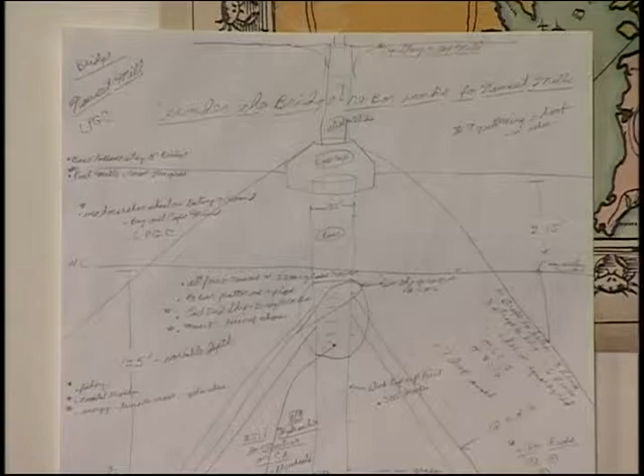Now, as I just explained, these 6 themes, as I call them, are the basis of all the bridge designing that I'm doing with the new middle bridge, or whatever we want to call it. And if these don't make sense, then the whole idea about the windmill bridge designs with the pavilions, etc., none of that makes sense either, because everything's built upon these foundational themes or theories.

And I've been working at this for a number of years, and I do believe I've solved the energy crisis. I think it was out there for anyone to solve, and I think I've solved it. But of course, this will take a lot of work and time and major effort from the world to do this whole project, which is probably the biggest infrastructure project the world has ever known, if it does happen, and I hope

it does. Now, I want to talk about what I call the Nauset mills. The Nauset mills are kind of a scaled down version of the Georges Bank mega mills. And if we would like, we can build them here, local industry.

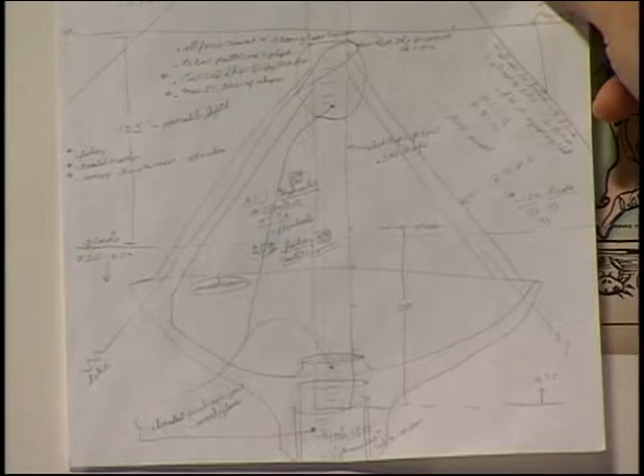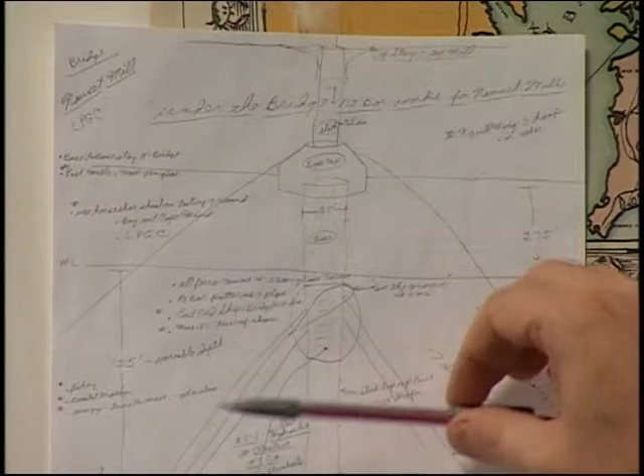So the mushroom anchor part is down here, and these pieces all fit together with threaded fittings. And then your grade or your bottom of the ocean would be about, whoops, bottom of the ocean be about right here. These are like a boat stand. These are 4 or 6 legs, and this is a fitting here that has threads, so this would thread into that and thread into that.

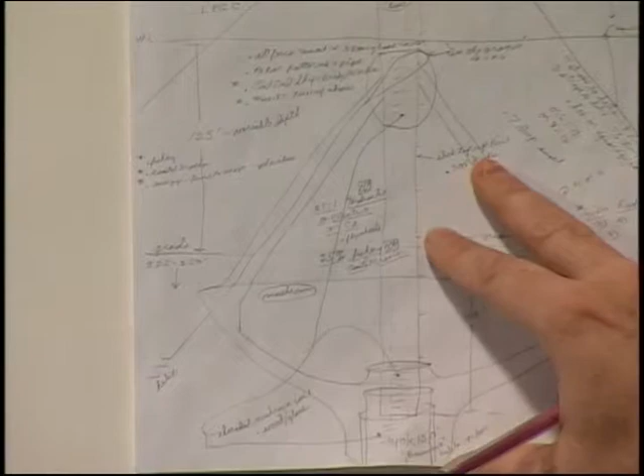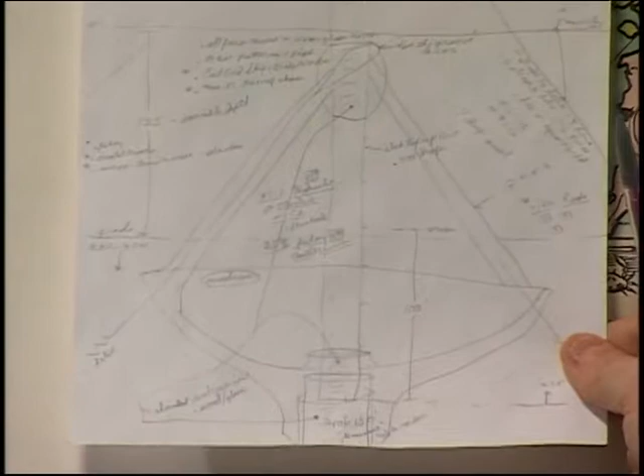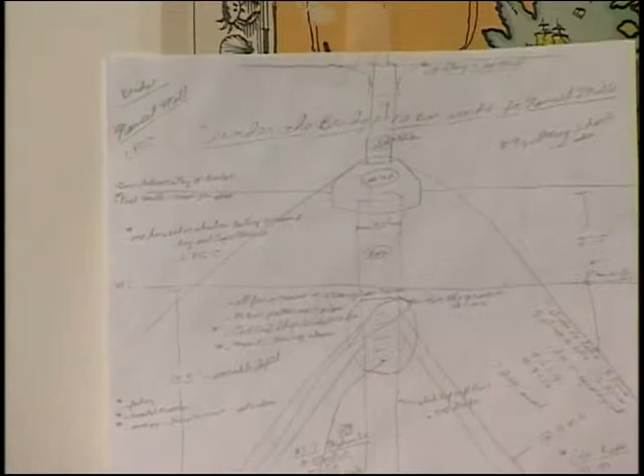And then what I didn't mention here was down below you have a big pipe going way down. As I have it drawn up, it's a 40-foot by 150-foot basement, I call it, because the stick, the whole theory is to go high you got to go low, and your stick wants to come way down into the sediments where we will hunker down from great winds. So that's that.

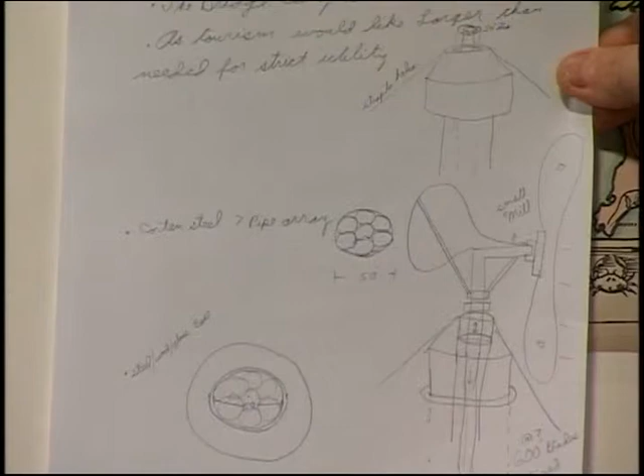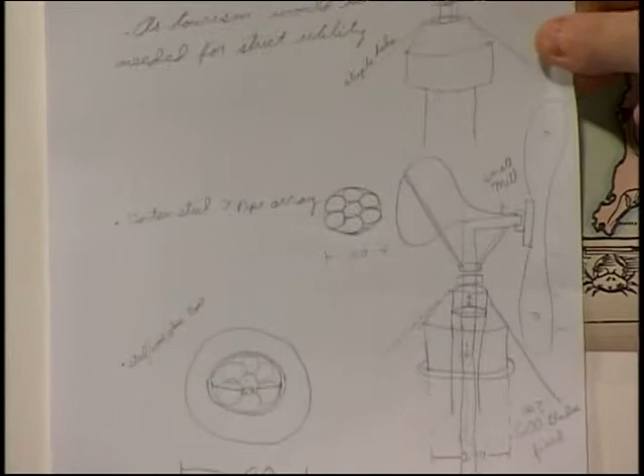Then you have to get your parts list, and then you have to keep perfecting it and making models and doing prototypes and computer models, and this is quite a project. And what I'm not really getting into discussions of is a lot of details about the stick and base construction. I have a lot of ideas about that. Here I have 50-foot diameter sticks that go down into these 80-foot diameter bases. And these might be good for the demonstration project at the canal.

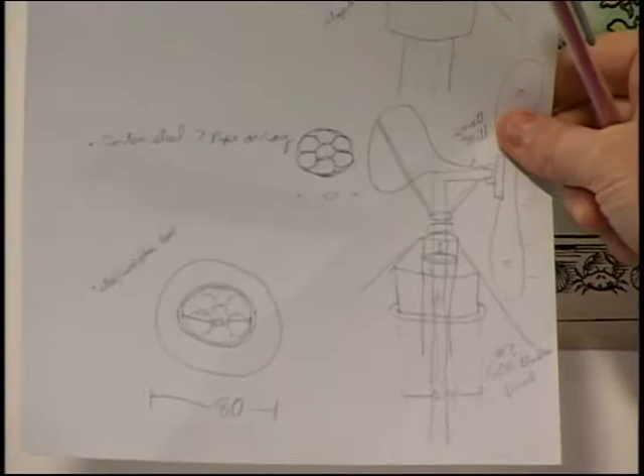And if you can see, that right there would be a stick, and that's steel pipe. 7 steel pipes, pretty strong units, welded together. And if you wanted to be fancy, up at the top, all my Georges Bank mega mills have these top mills, I call them, because you've got an extensive running rigging up at the top of your sticks. As well, the bases have all this rigging. That's mostly your standing rigging at the bases.

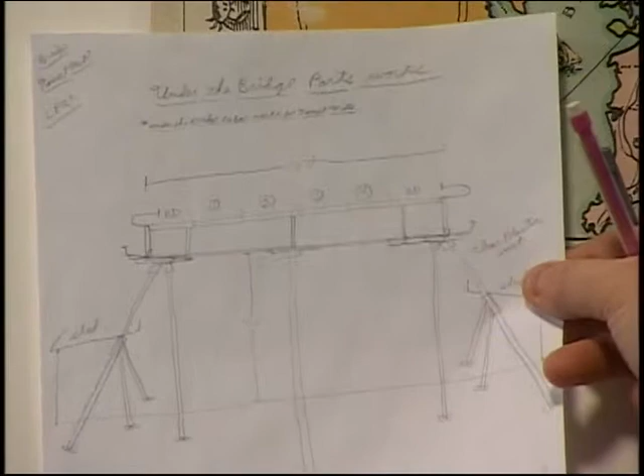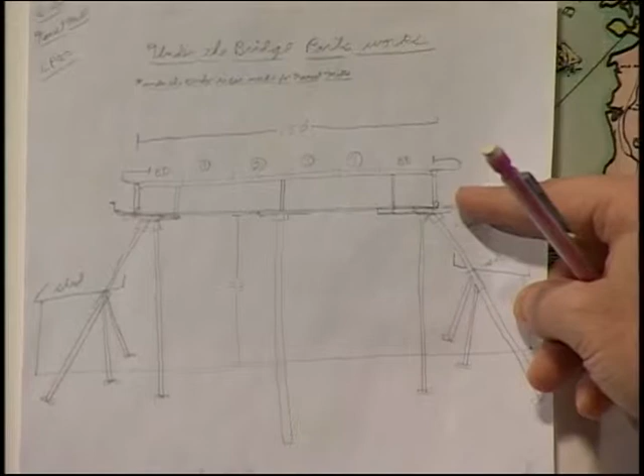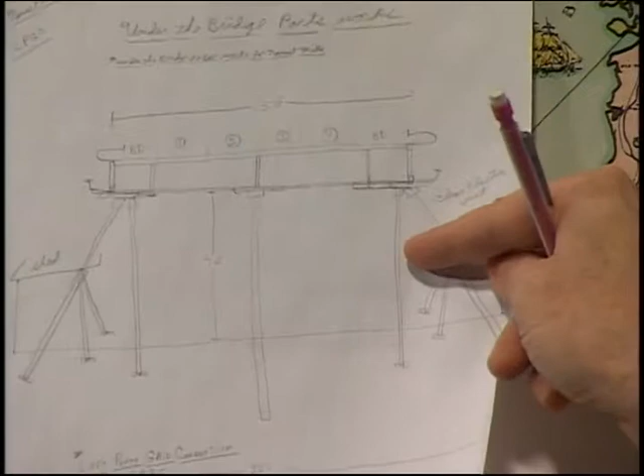So this is a brand of windmill that I call the Nauset Mill. And it's very closely related to the Georges Bank mega mill. Here I have a drawing of a bridge deck that would be over the land heading into Route 25, which turns into, let's say, excuse me, 495, and so there'd be a lot of financials to contend with, but I can see in my mind's eye the under the bridge parts works if we build these Nauset mills out of ferrocement and steel and some wood, plasticized wood most likely, because things are all threaded together.

So in my imagination, the Love Power Grid Consortium would be the main financial vehicle, legal vehicle for this huge partnership, which would be started here on the Cape. Now that's in the report that I did in February 2010, and that's the tripe system report.

And so, just out of my imagination, Springfield Rebar Works Incorporated, you'd have people coming from parts unknown here in Massachusetts. Amherst Prototype and Research and Development Company Incorporated, you'd have a lot of participation. Gloucester Tire Reef Works Incorporated. And there's Newport Rigging Companies would come in. New Bedford Rigging and Staging Companies, and it'd be a huge project. But as I say, it's not a jobs program. I mean, we need energy systems, utility systems, and transportation systems.

As I mentioned on a show earlier, our rail systems derive from the distance of the gauge. The 4-foot-8 gauge comes from the Roman times. If you can believe that, it is true. But these rail systems that we use now, they're okay, but they are 200 years old in design. So if we were to design a new rail system for the world, we would be really moving the world forward with efficient transportation systems designed for the new world, the new green energy world, that's required.

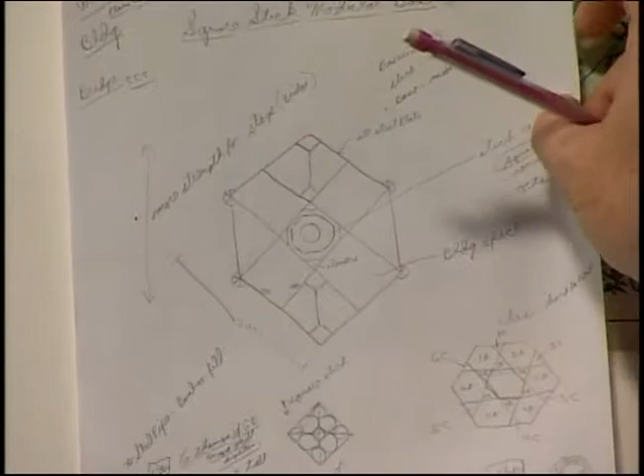So a lot of the work I do is designing these stick bases. And some of it's grandiose, you might say. Here's one that's pretty big. This is something recently I've drawn up, and it is a square stick modular base, and it's got directional strength written in there. So I've actually designed the base to be a building. That's the base. Excuse me. This is the base, and it's all steel.

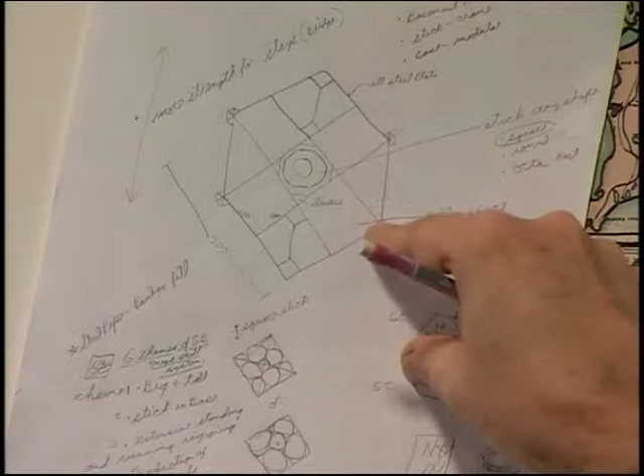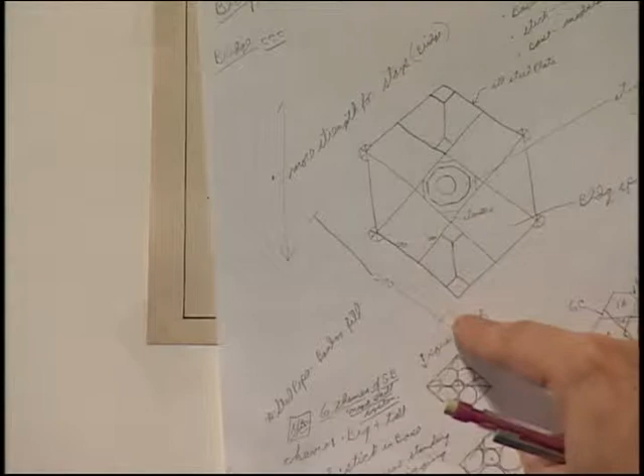It's designed for the plains, you know, everywhere from Texas up to the Dakotas and into Canada. And in here you've got a smaller square stick. That's a stick that goes up and down. That's a theme. Now you can do it hexagonally. That might make more sense. But this here is 300 feet across. 300 feet across. So you need to be substantial to go big and tall with these rigs and to get up where the money is, where the wind is. Okay.

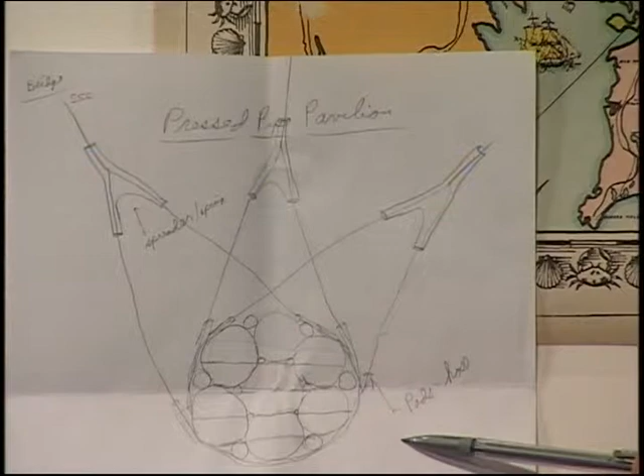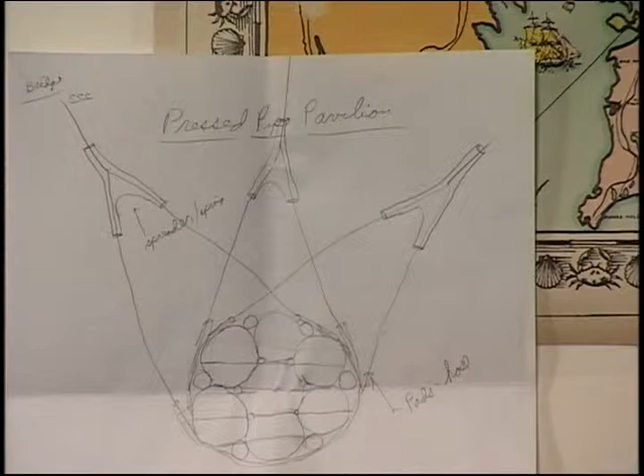So what you're looking at here is a huge pavilion. These are 20-foot diameter plastic pipes, all bound up together. High-tech. These are the floors. The people will look down on the bridges and the canal and all the tall ships. And this is your hanging gear to hang this pavilion up. So on the next show, I'll really get into that.

Okay, all right. I think I'll pretty much wrap up this show here and get into my next show talking about this grandiose project for the new bridge on the canal, which encompasses all the work I've done for many, many years with the windmills. And it'd be huge for tourism, huge for our technology, for the world's technologies.